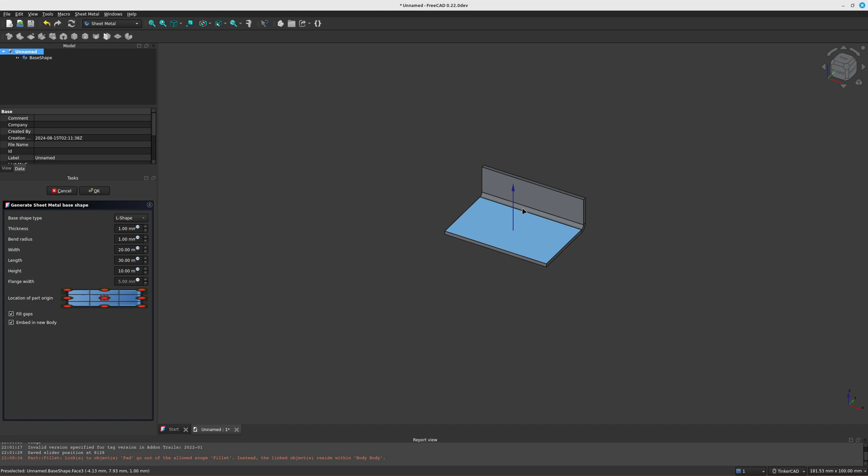On this new file, I've already selected the sheet metal workbench here, as you can see. We're going to use the add base shape. As you can see, now it's creating an L shape. On the dialog to the left, we have a toolbox, and here we can select the shape type - different shapes like tube, hat, box - but we can also select flat.

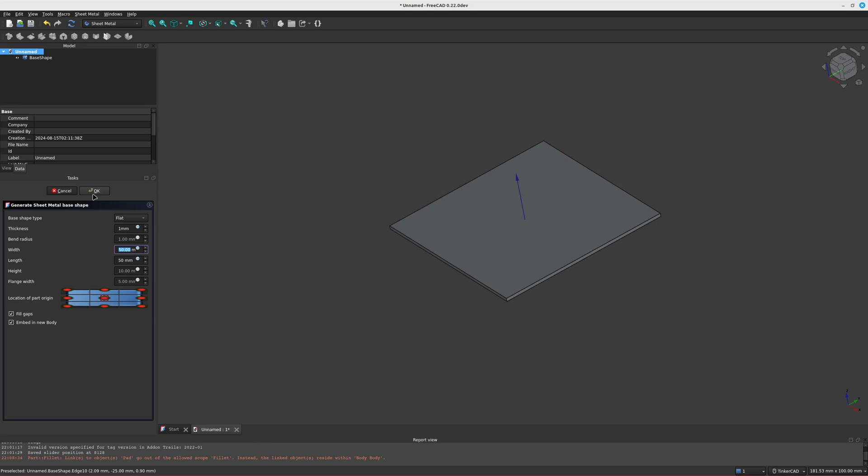So I'm going to create a flat sheet of 50 millimeters by 50 millimeters and 1 millimeter thick. The rest is about the same, so we're going to click OK. All right, so we have a body now with our sheet metal in there.

From there I'm going to go back to part design, and I'm going to create a new body. I'm going to move the sheet - I'm going to hide the sheet metal we created.

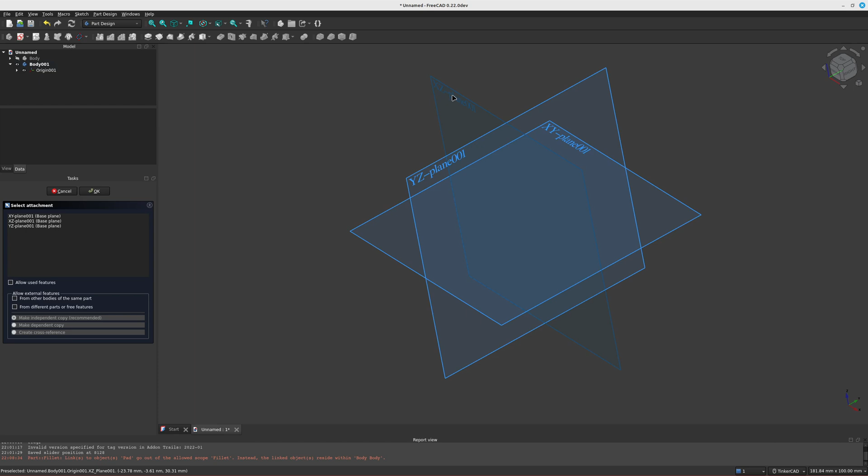On this new body, I'm going to create a new sketch. From that new sketch, I'm going to use the XZ plane, so it's going to be perpendicular to the sheet metal. You can see if I put it back together, the sheet metal appears as a flat object here.

So I'm back to my sketch here, and I'm just going to help myself with some grid. I'm going to make a rectangle 16 millimeters wide by 2 millimeters deep. I'm not going to fully constrain this object, but it's not really needed for the exercise here. So I'm going to close that.

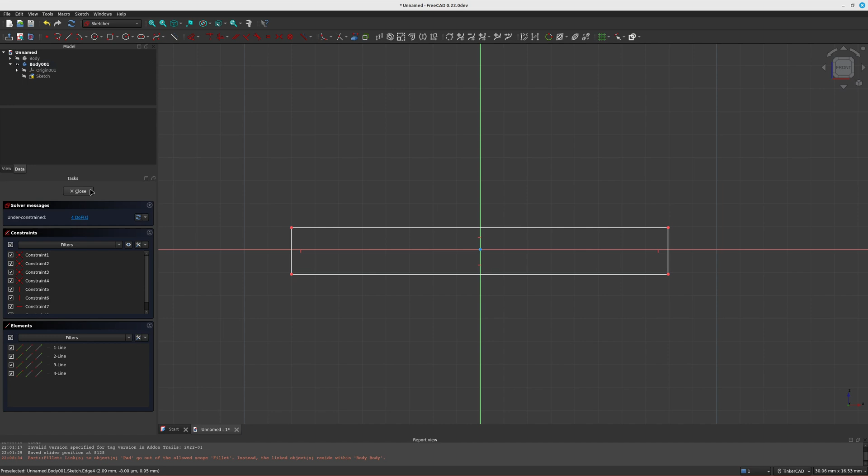So that sketch, I'm going to go and pad it. We had 16 millimeters - I'm going to add another 16 millimeters for the padding. So now I've got a nice little square box.

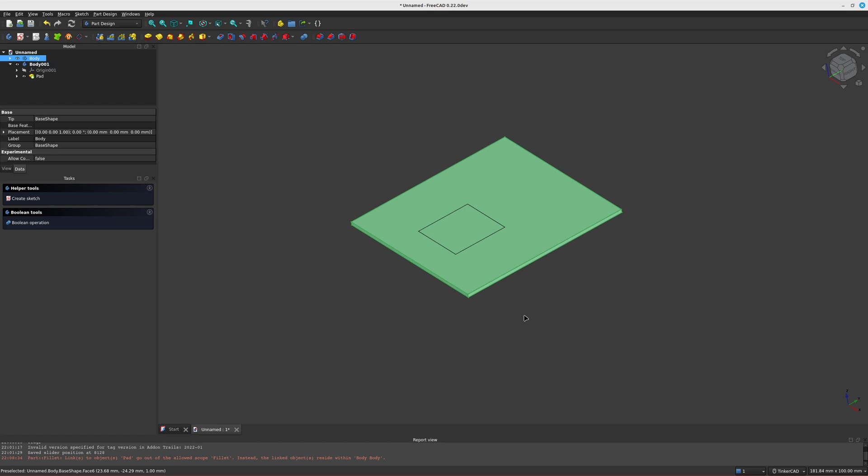And we do have our sheet metal on there too. So if I look right now, they're both located at the center. So I'm going to take that pad here, and I'm just going to move it out of the way - I'm going to transform it and move it up.

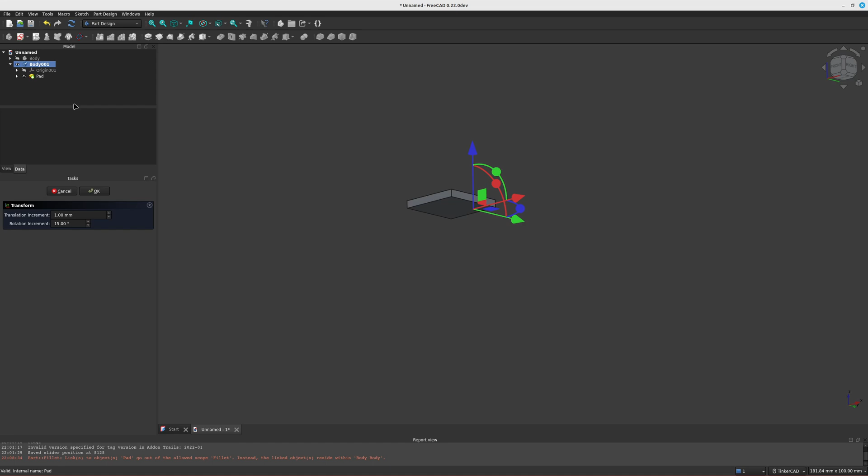I'm going to hide the sheet metal again. That's going to help me select the underside of it. So if I were to make that impression on the sheet metal, it will be a little bit too rough.

So what I'm going to do is smooth out the bottom part of that impression. I'm going to select the pad, go to part, and with that part selected, I'm going to select the bottom face. From that bottom face, I'm simply going to do a little fillet.

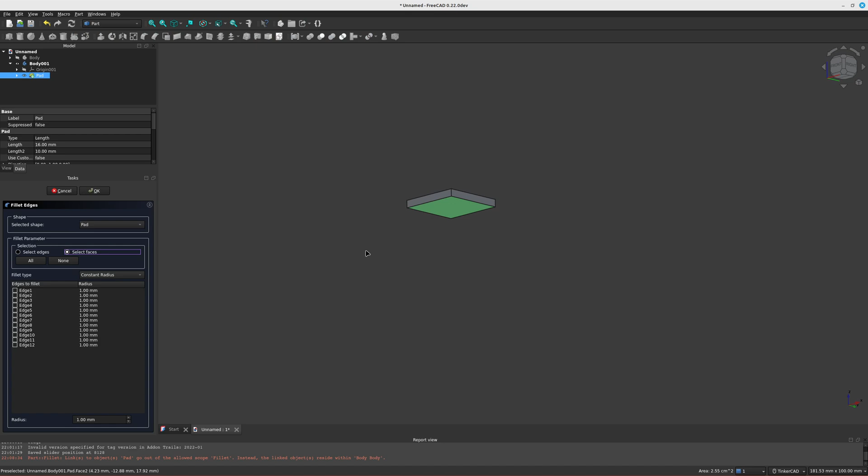So for the fillet, I'm going to select the faces here. As you can see, the thing is selected on the side, so we hit select face, and I'm going to select the whole bottom face. You'll see it automatically selects the edges that will be used for creating the fillet.

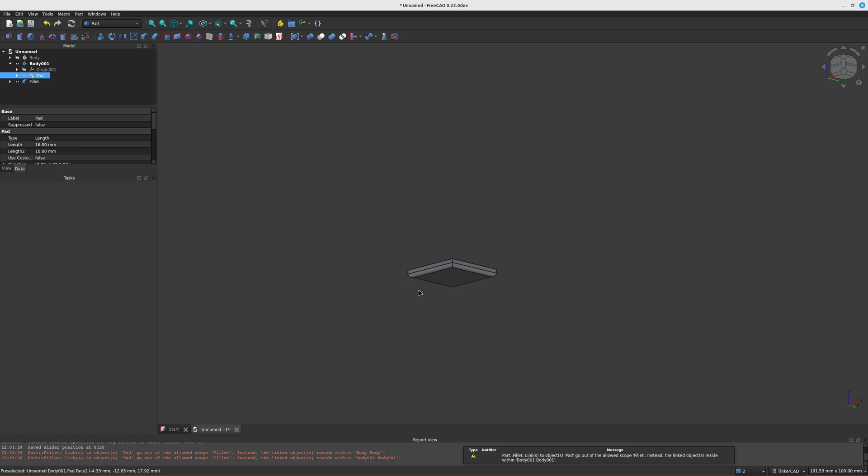From there, I'm going to select a radius. A radius of 1 will create a small fillet - it is small, but it's 1 millimeter. I'm going to make it a little bit bigger, so I double click on this, and here I can make the fillet all the way to 1.95 millimeters, let's say. As you can see, the fillet is a little bit smoother there.

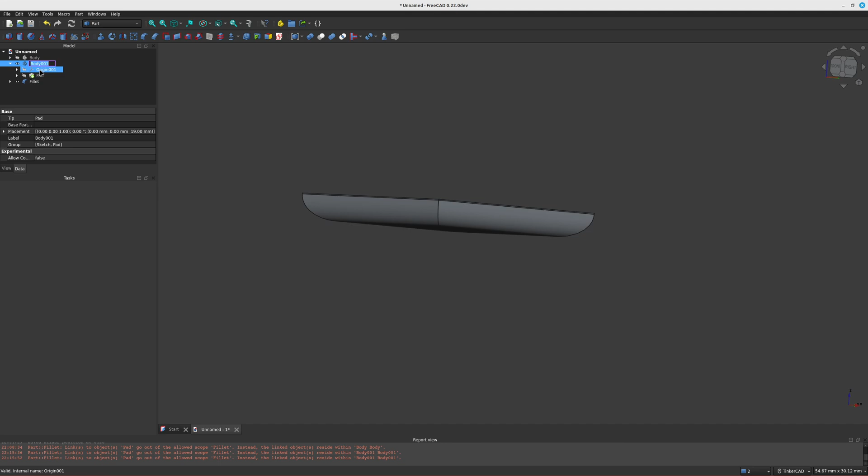So you can see as we press that object into the sheet metal, it will be a little bit more smooth and have less right angles. All right, so I'm going to call that pressed, embossed.

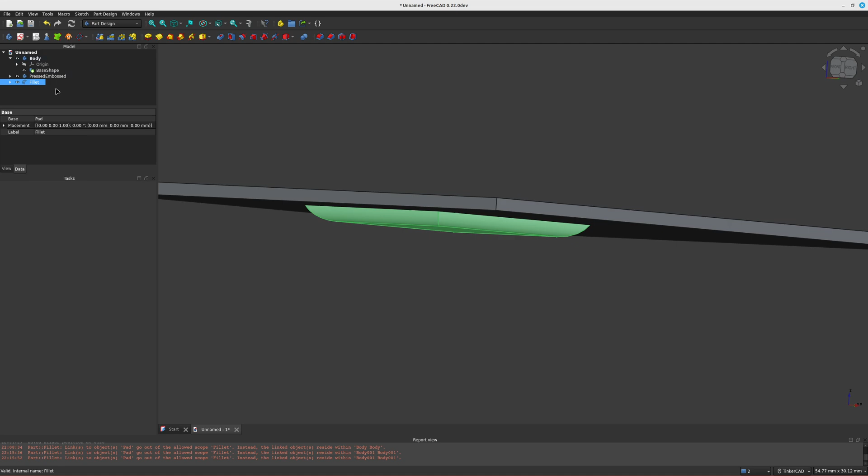From there, I'm going to select the body where I have my sheet metal. I'm going to double click on this and make it visible. I'm going to take that object again - the fillet object - and transform it, moving it up just a little bit.

There you go. So I've got my sheet metal here, and I've got the object that I want to emboss into that sheet metal. So I'm going to select the fillet, and I'm going to select that one.

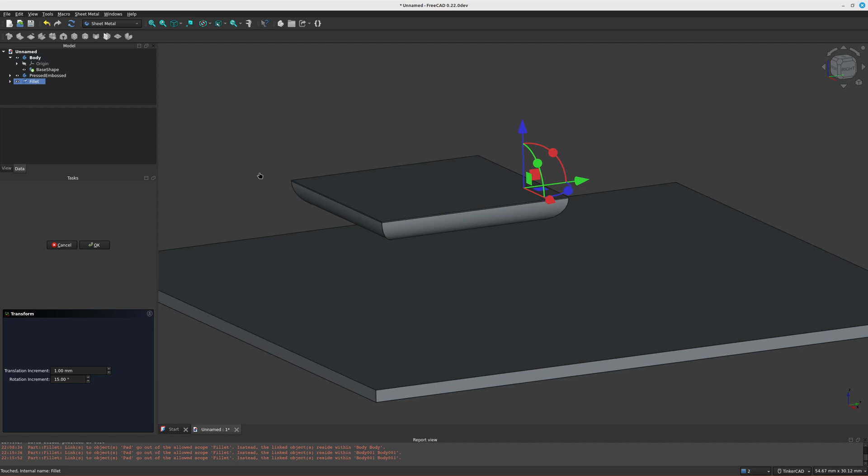So we're going to go to the sheet metal workbench, and what we want to use is almost the last icon here. In order to do that, I'm going to click OK on the task.

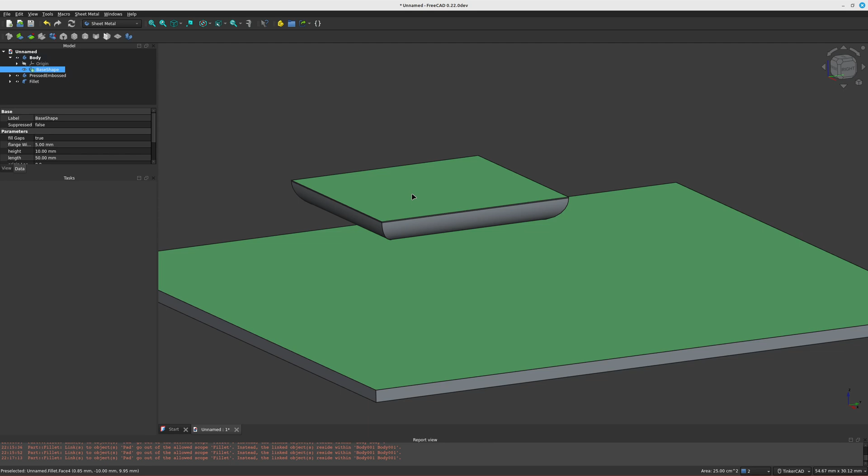In order to use this one here - sorry, the make forming in wall - what we need to do is select the top of the sheet metal, and using the control key, select the top of the pressed object. Once we select those two, we see that the icon is enabled, which is make forming in wall.

So we're going to click on this, and suddenly we have our object that's pressed into the sheet metal.

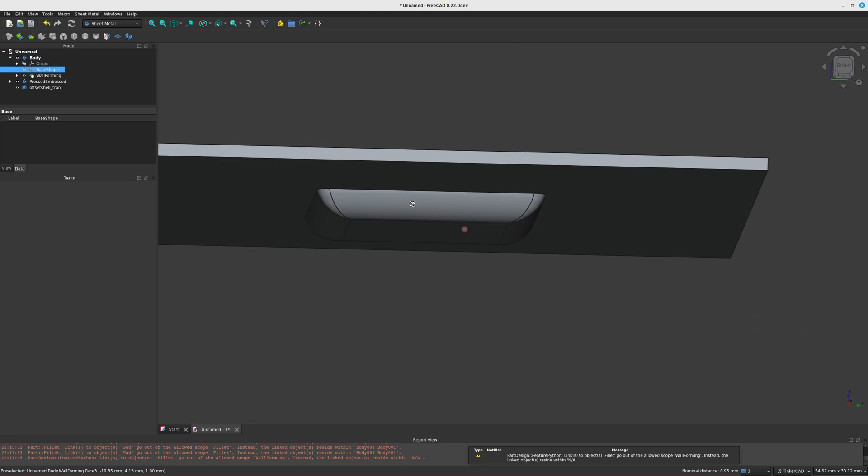So the tool is going to try to make sure that we have the exact same thickness as we come down. As you can see, it's nice and smooth as it's coming down. The outside shape here is just helping drive it down, but it's pretty much flat, and we have a smooth coming back.

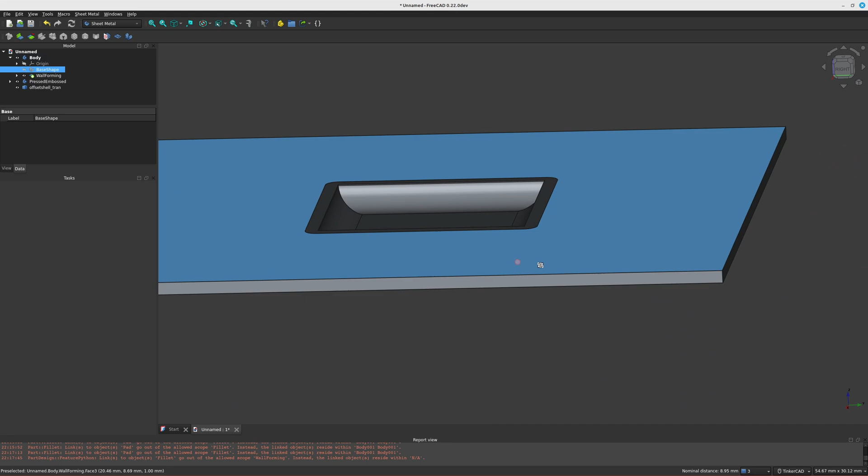So now I've got my sheet metal here with the embossed pattern. How do I press that down? That's the final product that I want to put on my product. How do I actually create that? What people do is they stamp it using dies. So how do I make a die in FreeCAD to actually press this shape into that sheet metal? Well, it's actually pretty easy.

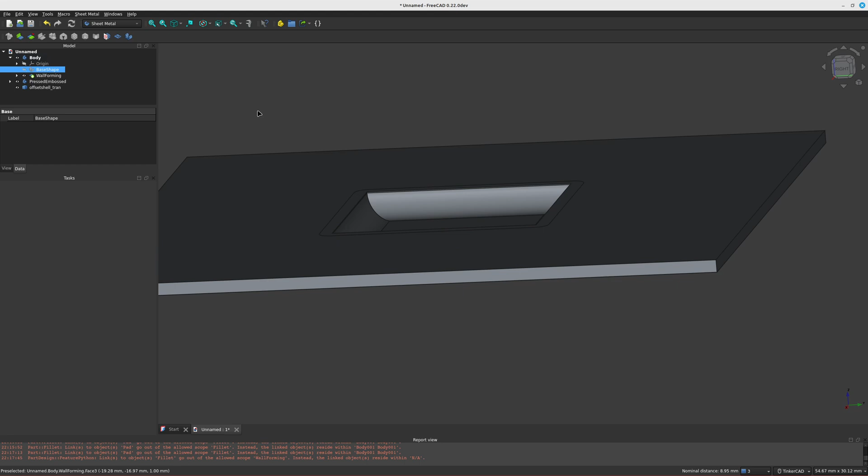What I'm going to do is first I'm going to rename that press metal.

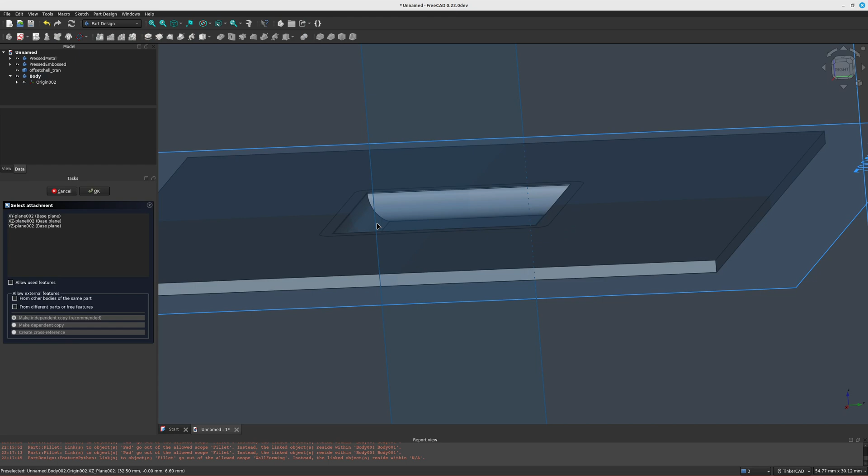So I'm going to create another object. I'm going to go back to part design, and I'm going to create a new body. From this new body, I'm going to create a new sketch. In that new sketch, I'm going to take the XY plane.

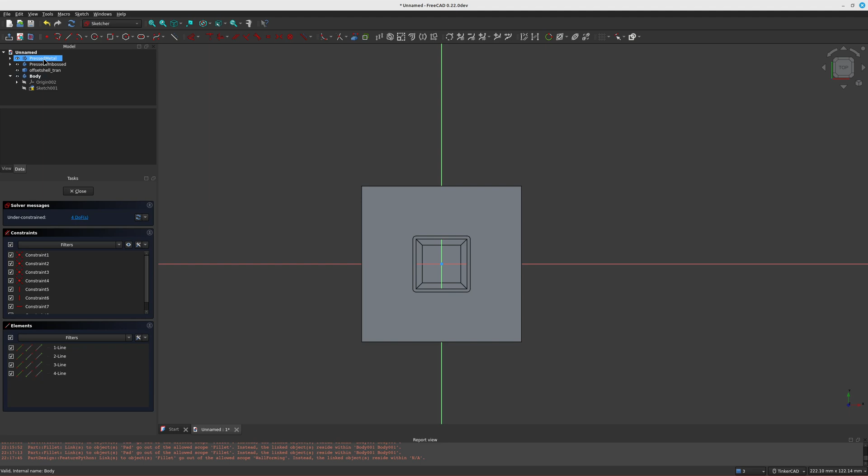So what I'm going to do is I want to actually create the dies. I'm going to make a rectangle that's within the press sheet metal that I've got here, right there. I'm not seeing it right now because it's being hidden by the press metal object. I'm going to close all those. That's my die here. If I put the press metal sheet here, you see that it's actually hidden, but it's right there. So I'm going to close that.

And what I'm going to do is I'm going to pad it. The sheet metal was 1 millimeter plus another 2 millimeters for the pressed object, but I want some pretty strong die, so I'm going to put 25 millimeters. And I'm going to put it symmetrical to the plane, so it's going to put 12.5 millimeters above the Z plane and 12.5 below the Z plane. So I click OK on that.

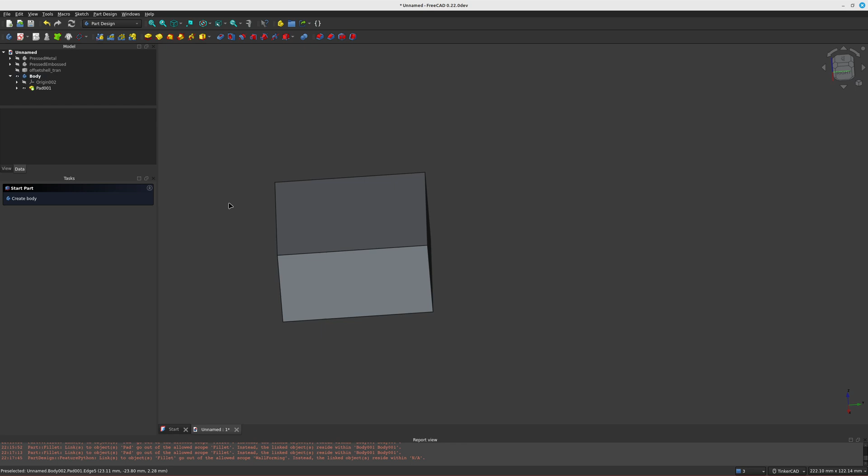So now if I get my sheet metal, as you can see, I've got a box that's not all the way out to the edge of the sheet metal, but that encompasses everything inside.

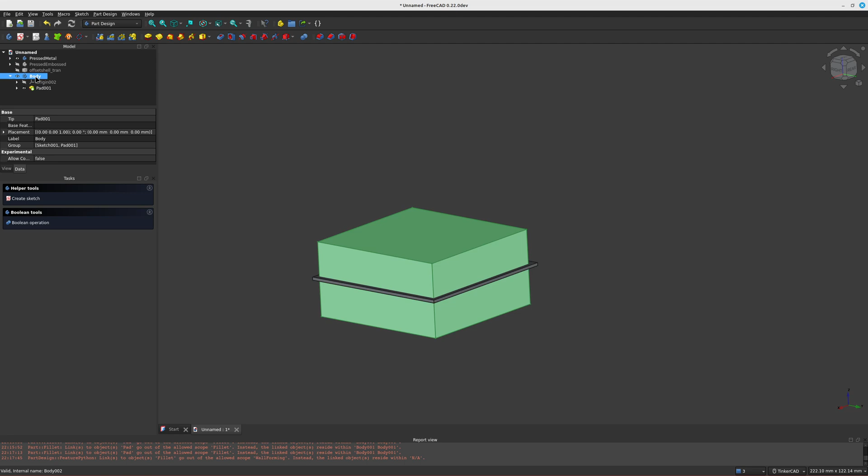Okay, so what I'm going to do is I want to keep that box, so I'm going to use this, and I'm going to select with the control key the press metal. I'm going to go to my part workbench, and just do a cut. And now what happened is that we kept everything that's not touching, that's not inside that sheet metal.

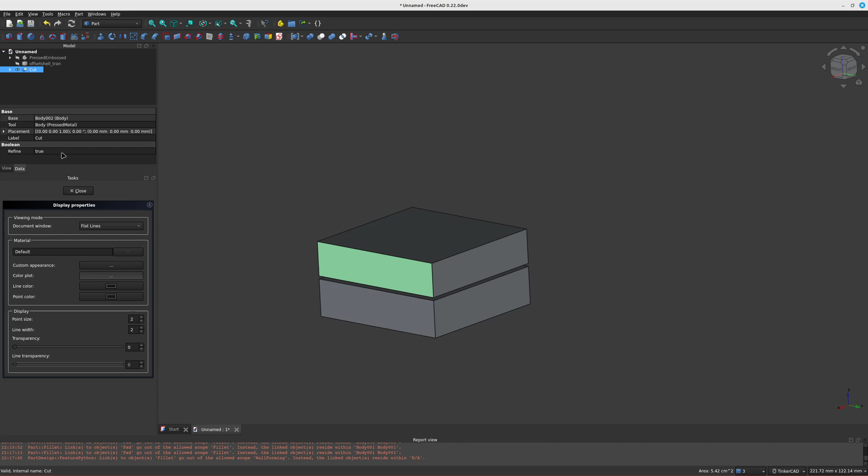So the great thing about this is that if you put the appearance as being wireframe, as you can see here, we do have the object that actually created the two dies. Pretty fun. So now how do I separate those objects?

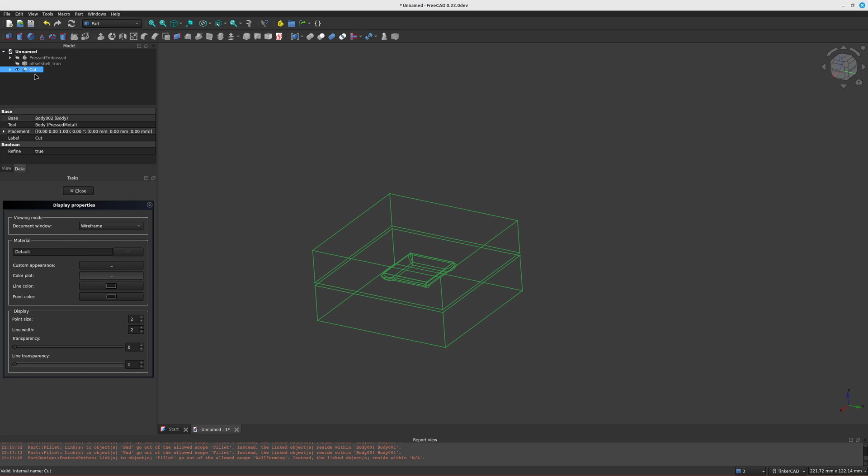Well, it's very simple. When you select the cut, the new object called cut, and you go to part, you've got a menu that says compound and explode compound. So we're going to click on that, and now we have a new folder here. The two parts are still here, but we have a new folder, and the new folder has cut 1 and cut 0.

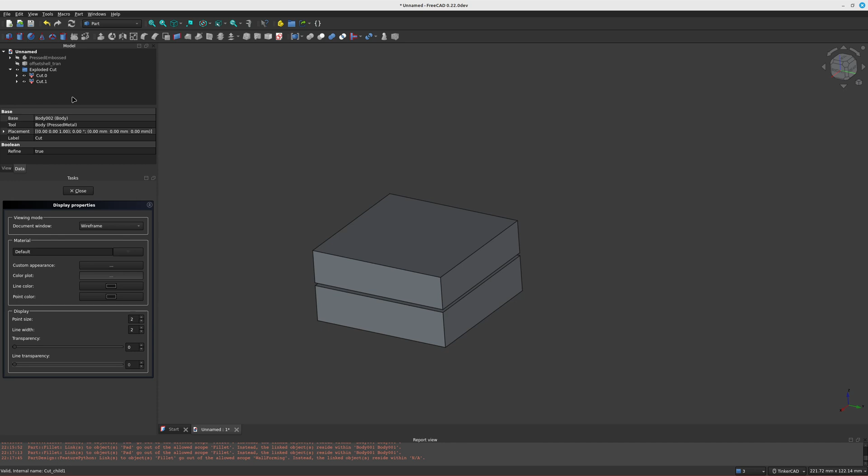So basically, when it did the Boolean operation, it actually divided the big cube that we had into two different cubes that are not touching each other. So we have the cube on top here, that's called cut 1. We can call that the top die, and you have the cube on bottom, the bottom die.

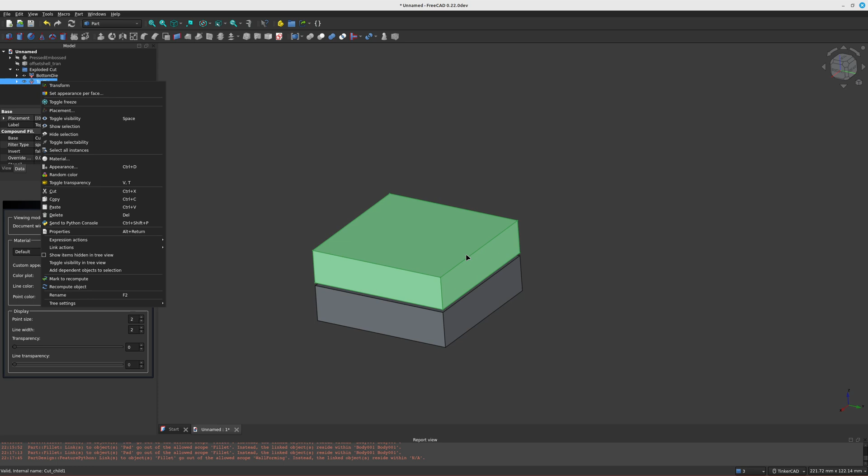So if I take the top die and I change the appearance... I take the top die and change its appearance. No, I cannot change the appearance. All right, actually it's right here, so it's already open. So if I select the top one and I say I want a wireframe, you can see how the top one is being put together.

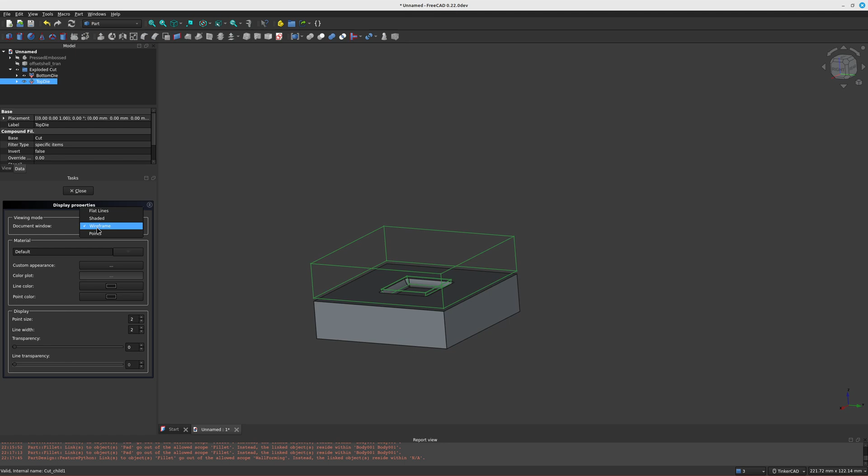If I select the bottom one, go to the appearance and select flat lines. If I select the bottom one, say wireframe, then I've got my bottom one. And so we do have the space for the sheet metal to be deformed between the two. All right, so this is how you get the two put together.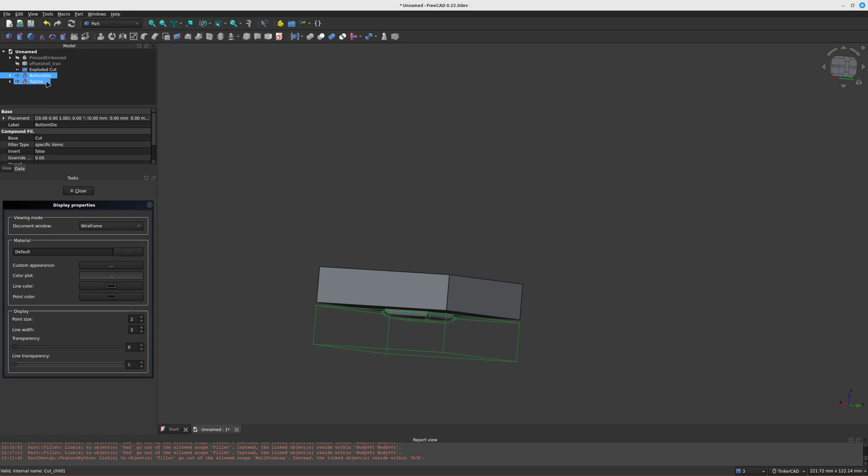Now, what you can do is to actually separate those objects into two different bodies and then make modifications as you want. But basically, you've got your two dies. You can put some pins, you can put some holes, some alignment pins. You can pretty much finish your object the way you want.